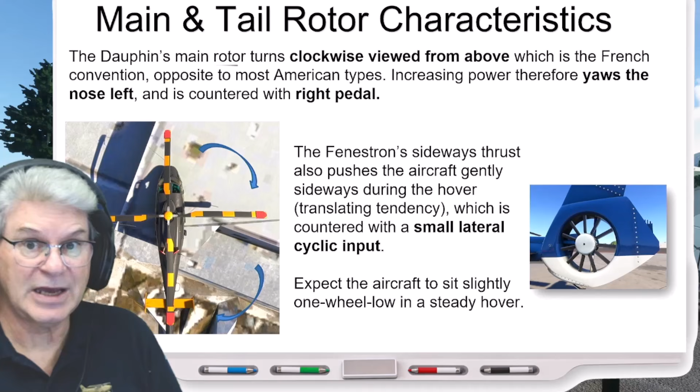Tonight you'll be seeing me demo with no assists. Let's see how I do it. I did teach a helicopter course. I should be able to do it.

All right, so let's go take a look now at the roles and the operational use of the difference between the two. The one on the left is what we're taking today, and next week we'll take the one on the right. So the one on the left, the Dauphin, the 365, offshore oil rig transport.

Emergency medical services, law enforcement, search and rescue, VIP executive transport - and they got liveries for each one of these, you guys. Border patrol and firefighting. Wait a minute, firefighting?

Can we use that in career mode? Yeah, so that's VIP transport in career mode, SAR in career mode. We'll talk more about career mode. This is exciting, and you'll see more and more native 2024 products that will be able to be used in career mode.

I've been mentioning this for the last 6 months, and they're coming at us. If they are native, it depends whether they flip the switch and whether you meet Microsoft's criteria, but typically if they're native 24, you can probably use them in career mode. I believe it's actually up to the developer - maybe the developer has to jump through some hoops, and that's why they can say no. They can decide.

I would wonder why they wouldn't, because there's a whole crowd that would buy your product because it can be used in career mode, and more people want them. That's one of the biggest complaints on their list from Microsoft - why can't we have this in career mode? They don't understand why. Because the developer doesn't want you to, probably.

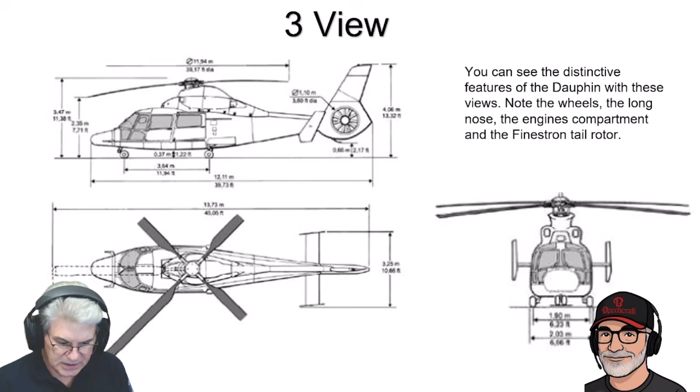Let's come back here to the classroom. So I'm not going to dwell on this stuff, just the features of this helicopter: 4-blade, clockwise rotation from the top. The fact that it has wheels, and I'm serious, I mean it almost sounds funny, like oh Howard said it's a feature. No, it's like a lot of helicopters we look at, they just have a rail on the side, and there's no suspension whatsoever.

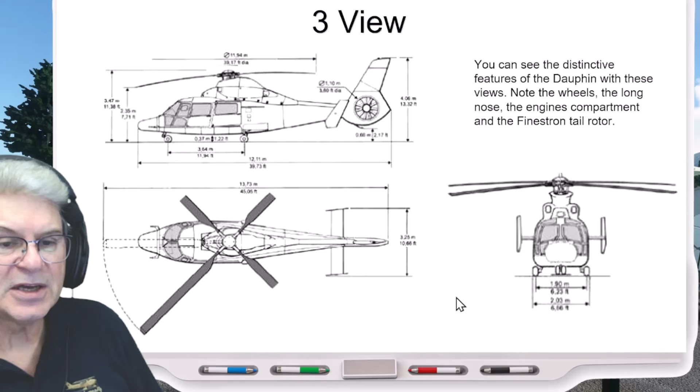You notice even in training in the R-22, we've just got skid height. We got these skids on the side that have no flexibility whatsoever. We put that helicopter down hard, we feel it in the seat of our pants. So here with these tricycle gear with suspension, this thing can come down hard if it has to, or come down hard on a deck of an aircraft carrier, or come down hard on the deck of any aircraft or any boat or ship that can take it. And that's a good thing, you guys, because there are times in emergencies when you aren't bringing things in gently.

Here's what's under the covers. Now this one is the 365N2 that we're looking at right now tonight for this lesson. The next page will show you the engine that they're using in the HH65, and we'll go take a look at that in a second. But this is the best one I can find to let us see what that looks like.

This is the air intake over here on the left side coming through here. You can also see they've painted it so you see the combustion chamber, and here's the air intake at the back and all of that, and then the exhaust that gets pushed out the back. So it's kind of interesting when you see these things in action. Here it's just a picture, but it gives you an idea.

This is single stage, there's a single stage axial plus a single stage centrifugal. In here, take a look at some of the temperatures and the power output. All right, and thanks Charlie for that. When you were doing the proofreading, I forgot to put kilowatts in there.

Varies. This specific engine, very popular, thousands of them made for different helicopters. You can see here, this can vary depending on the helicopter, but this one produces 737. I saw one stat that said it produces 735. Okay, what's a couple of horsepower when you're up into 700, right?

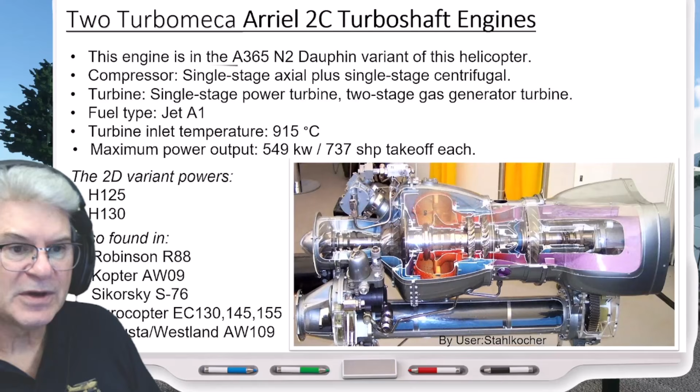Here's what's in the HH65 Dolphin that we are going to be looking at next week. Very different looking engine if you take a look at this. And there's, you can see the air intake all the way around.

This one's found in the Air Tractor AT302, not the 802, the 302, the earlier version of that. And the Bell 222 we already have in the sim. The Piaggio 166, we took that last week. And the Eurocopter AS350. So, you know, it's like they're using engines that are used in many others, and of course they work well. This has 700 horsepower.

Now, why would they change differently? Well, this one was under contract to make for the U.S. Coast Guard. That's this version. That's what we'll be taking next week. So I wanted to show you that there is two different kinds.

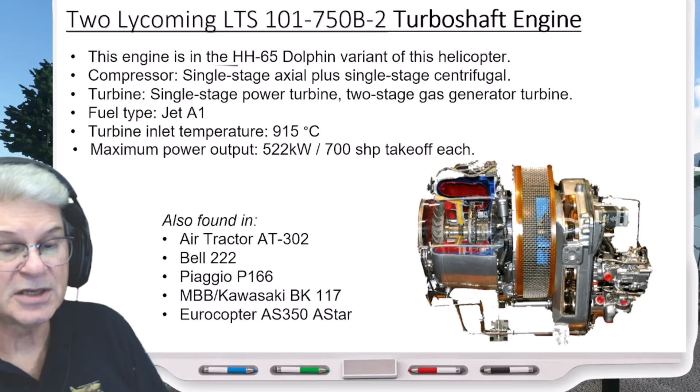Now, Lycoming actually was taken over by another company now too, but Lycoming is a very common name in engines. You look at all the Cessna line and all the Cessnas I've been flying all these years in real life, and we had to understand that engine inside out in case there was troubles with it. And Lycoming has been making engines all their years.

All right, now we're going to get into the important stuff. Everything up to now has been informative about this helicopter, where it is, where it belongs, what it is. And now we have to start configuring it for our sim.

Wow. So I've got more than that on here now because I've got a gear switch on there now too for gear, because it's a different gear switch. And you can just reach into the cockpit and click it with your mouse, but I've got a gear mapping on there now too. Now, I do want to mention this.

I put this in here just for reference because there are some people who might be viewing tonight that have never configured a helicopter or know the difference between a collective and a cyclic. So I know that might sound strange, you guys. Some of you have been with me for years and you know the difference, and I've done tons of helicopter lessons. We know the difference, but not everybody does. So bear with me while I make sure that it's clear for everybody.

The collective is typically the bar beside you. In real life, it's the bar beside your left leg. No matter which seat you're in, it's the bar beside your left leg that is pivoted at your hip and goes up to make the helicopter go up and down to make the helicopter come back down. All right, and what that does, it changes the pitch of the blades of the rotor at the top of the helicopter. And that's all it does. It changes the pitch of the blades.

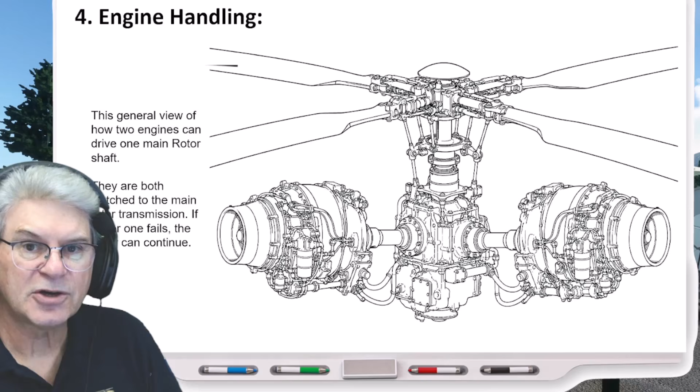At whatever horsepower they are, their sole purpose is to produce torque on that shaft to the transmission. Either one of them can fail and the other will keep it going. Let's try that, reach up, kill an engine, and see how it performs. Let's also kill both engines and do an auto-rotate, and hope we don't land in the water. That's the fun of the sim. Just go for it, right?

So in the engine handling section, I want you to understand this. Let's just take a look. We're not focusing on study level yet, we're just getting familiar, all right?

This thing is certainly study level, without a doubt, not even borderline. This is full study level. Everything works. And when I say everything works, maybe someone's going to find something and say, Howard, this switch over here doesn't work. I'm mocking you guys when I say that, because for some reason people think that if one switch or one circuit breaker doesn't work, then it's not study level.

Keep in mind, I've been teaching and flying for many years. I've been a pilot since the 90s, and my background trade is teacher. I'll tell you this: if you're going to a book to study something and then applying it inside this helicopter or aircraft, you're starting to move into study level. If this is the airplane at your flight school and you're flying it all the time, studying it and practicing here, you're doing study level. So whatever that's blown up to be, study level means you can learn from it and practice what they do in real life, and we're doing both of those things here. So I don't care if there's a circuit breaker in here that doesn't work - this is a study level, deep dive helicopter. If you can master this, you should be proud of yourself.

In here, FADEC controls these two turboshaft engines, one row for each engine. Pretty simple how they lay that out. And you can see with the controls overhead too, one for each engine.

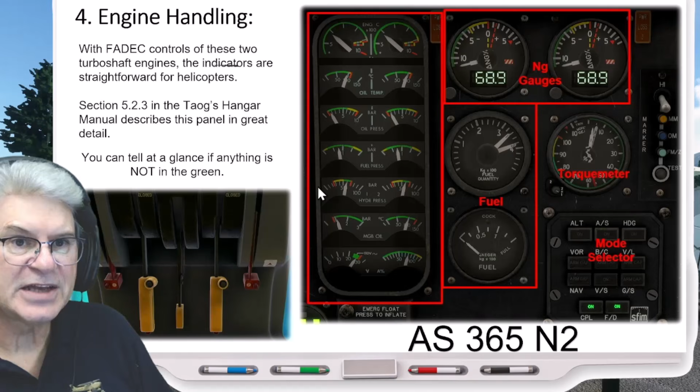So we have this rotor brake in the middle up top. Now take a look here, obviously fuel gauges. Take a look here, the torque meter - we're going to focus in a little more on that one. And the NG gauges, we're going to focus a little more on that one to find out more about it. Down here, just below them, is the mode selector for all the different modes. We're going to get into this before we finish tonight - that will be the last part of our flight. So that's our engine area, the main parts of our engine area.

Let's focus in on this, the Delta NG gauges.

Hey, pilot guy Jay, how's it going? But aren't we so blessed that we live in this country to be able to fly freely? Oh yeah, I read that before, right? Did you post it twice? I hope not - I think I'm just reading the same thing again.

ChatGPT drew that, it's amazing. Yeah, Paul, it did. I just told it what I was after. I said the focus had to be the 2 turboshaft engines on one transmission for the helicopter, right? It drew that for me.

Yeah, it's amazing. So this is Delta NG gauges, per engine gas generator instruments. I'm pulling this part right out of the manual, and it says normal governed range. So pilots monitor the NG during engine starts. That's important. If you go through the checklist, you'll be watching this for specific things, for fuel efficiency and overall mechanical health.

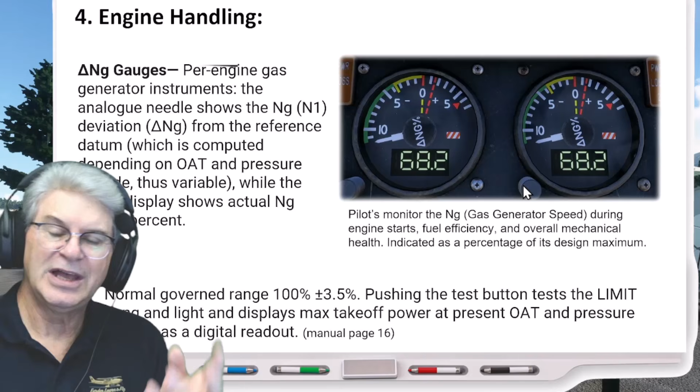You glance at this, all right? It's in percentage, there's also some digits on each one. Both of them are equal right now. And you can see here, pushing the test button tests the limit gong and light and displays maximum takeoff power at the present outside air temperature and pressure altitude as a digital readout. So this, again, is why it's study level. In the real helicopter, if this didn't work, you'd go, how am I supposed to even practice this stuff?

So that's why I'm calling it study level too. So it's in, torque meter too. This is important, you notice there's a 2, 1 plus 2, and a 1. You can change this down here. I'm making big diagrams so that I don't have to zoom in and go play inside the cockpit. I'm showing you some of these. Also, when you download this PDF later, you'll have all these references that you can look at later, especially those key bindings, you guys, like, whew.

Notice here, key limits, 100% in hover and acceleration to VY. VY in this is right here, 75 knots. 88% continuous above 75 knots.

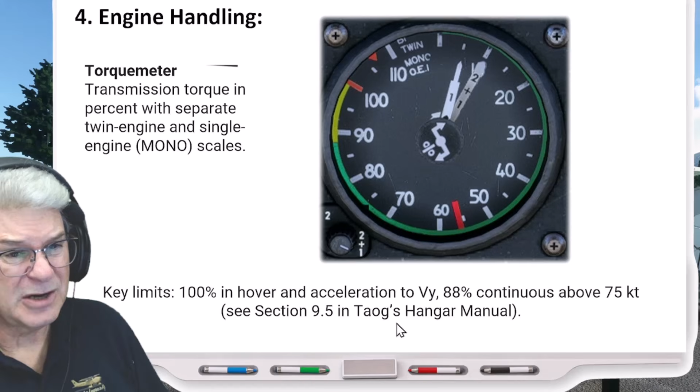And again, I make reference, you guys, because I learned all this stuff from Taog's Hangar manual. I didn't have to reference Google or reference the POH, which I typically do when I make a lesson. It was still a lot of work. I'm only mentioning that because there are some lessons I can do in a couple of days and send off to the proofreaders. This one, right up to today — I sent the first draft last night, late, to the proofreaders, and then today I did another couple of hours of fine-tuning while I was flying.

So engine handling, here's engines off. We're looking at rotor RPM here. Engines off, you'll see rotor settling. In this case, the first engine had started up and the rotor — you'll see that right away when we were doing our startup. R is the rotor, the longer one is the rotor. It should settle back here into green.

Here's number 1 engine that started first. Here we see number 2 now catching up while the other 2 are settling where they're supposed to. This is the governor taking care of making sure those RPMs are where they should be. And then here we see the second one coming up. Finally, when you're flying, you should see all needles aligned in the green.

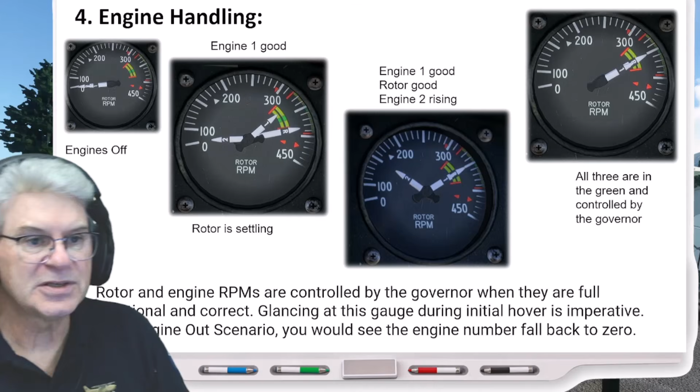This is good. When you glance at this, if you've lost an engine, it's going to look like this as it's falling, and it's going to look like this when it's done. You've got 1 engine to get you there, which can still happen, but you typically go and land at the nearest airport or the nearest place you can land when that happens. Because what happens if your second engine goes? What if it's a fuel contamination or starvation kind of scenario?

So we're learning the basics tonight, we're flying it tonight, we're getting comfortable with putting it down gently where we want it. We're going to do some autopilot stuff and some beep trim stuff tonight, but we jump into this thing next week — look out! So come join us next week, you guys, so we learn more about the Dolphin. Special features of the airframe: the 4-blade Starflex main rotor, which is not like conventional rotors, you guys.

Fully articulated composite head without conventional flap or drag hinges, which makes maintenance easier. So that's not like the picture you saw earlier.

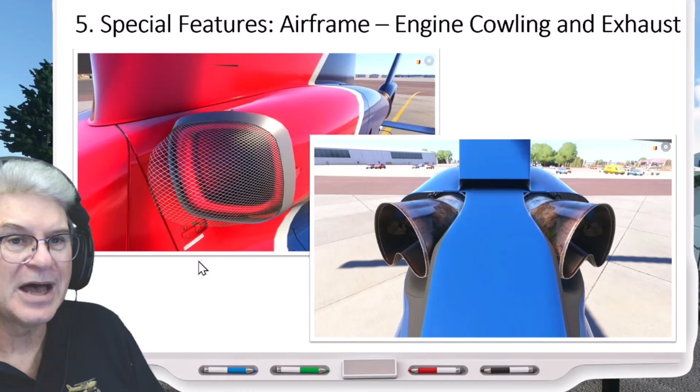It's like, how did they even get past quality control? Here's the intake for one of the engines, and here's the exhaust for both of them. This is that typical Airbus kind of design where they've got that little lip on the bottom, that little pouty face, and you can see they're angled outwards. There's one engine on the right, one on the left, coupled in the middle straight up to the rotor. It's an amazing amount of power sitting up there above us.

There is the Fenestron tail rotor, as we mentioned about. We talked about that already, so we're good. And the retractable gear, we already walked around the whole thing.

Oh, this one shows the finish well. This is harder for a developer to do, to make this beautiful kind of realistic finish, not that perfect with a perfect color all the way down. Look at all the different shades. I'm not a color person, I'm not an artist, but artists will say it's all about different shades of the color and different lighting, and that's exactly what we got here. Plus it's mirroring the tarmac beside it. Does it get any more real than this? Just amazing.

So, special features - Maddie Lynn, you'll want to know about this because the variants and the mission equipment you need for them is the confusing part for a lot of people. I want to take this thing into career mode - what do I need to do? Mission equipment is fixed per variant.

Let's say the Bambi bucket, you want to do some firefighting stuff - again, utility can do the firefighting. Utility can have a water tank, and again utility long nose can also do that too. Bambi bucket, for those who don't know, is the basket on the long cord underneath the helicopter that can be dipped into a pool or lake to pull out a big bucket of water, take it over the fire, and then release it.